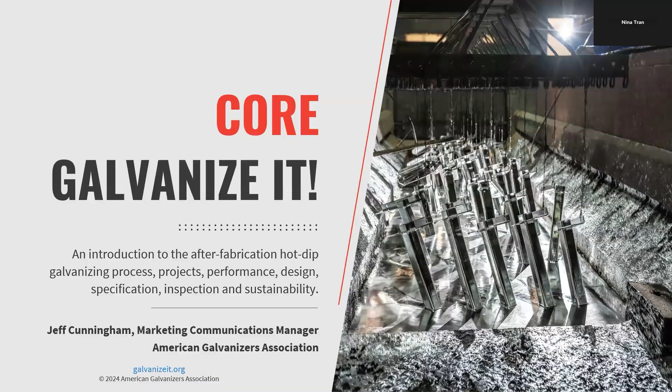The purpose of this seminar is to educate architects, engineers, and other specifiers about the benefits of utilizing hot dip galvanized steel on a myriad of projects throughout North America. You'll also be able to differentiate hot dip galvanizing from other zinc coatings, since sometimes we get confused with those. And then, of course, recognize positive environmental and economic contributions to the goals of sustainable development, which is critical in the world today.

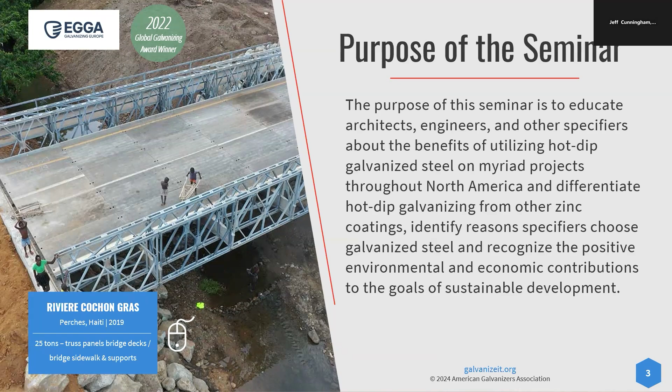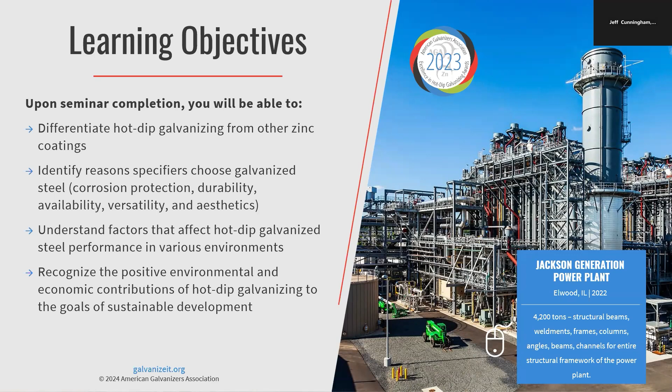Learning objectives: differentiate hot dip galvanizing from other zinc coatings, and identify reasons why specifiers choose galvanized steel. First and foremost, corrosion protection, but we'll also go into durability, availability, versatility, and aesthetics. We'll also understand factors that affect hot dip galvanized steel performance in various environments, and the goals of sustainable development, both environmentally and economically viable for hot dip galvanized steel.

Just a little bit about the AGA, or the American Galvanizers Association. We represent over 172 hot dip galvanizing plants in North America, Canada, US, and Mexico, with over 76 member companies. We provide technical support on design, inspection, and specification of hot dip galvanized steel. So if you guys are ever working on a project or have any questions, feel free to use us as a free resource. We also provide marketing material for our members, and for specifiers, once again, that's a free resource for specifying hot dip galvanized steel.

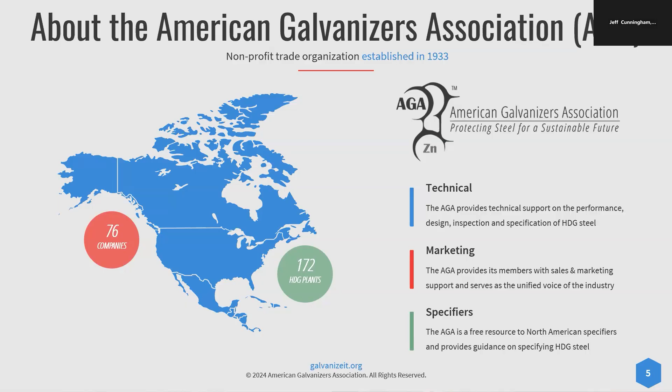First and foremost, we will talk about structural steel, how it's reliable, resilient, and recyclable. Since I think everyone's on the call right now, before we really get into the nitty-gritty, I just want to mention on these slides, anytime you see one of these mouse icons, it's clickable. It takes you right to our project gallery about that project. So pretty much every slide has a link on it to either a publication, case study, or anything like that.

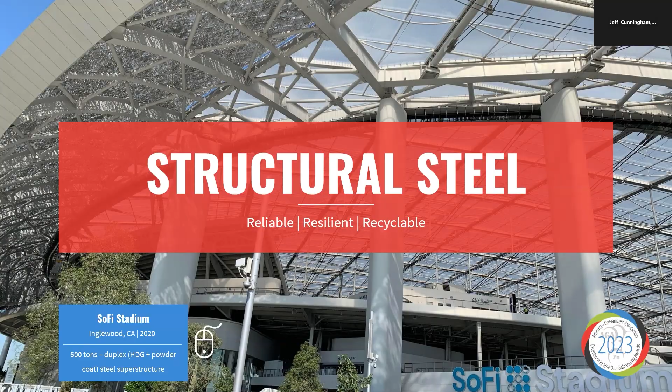So let's talk about why structural steel is reliable, resilient, and recyclable. Reliable, well, it's readily available. Steel is one of the most common building materials out there. It is cost effective. Galvanized steel has a quick turnaround time, so you can have something built as galvanized in as quick as 8-12 hours, allowing accelerated construction schedules and saving costs in time.

It's highly resilient too. It has a high strength to weight ratio compared to concrete, about 1 to 6. It's highly adaptable, so future expansions are super easy to do on existing hot dip galvanized structures. This also gives you more design freedom with aesthetic advantages. We're starting to see more architecturally exposed structural steel with galvanizing as a focal point of the project.

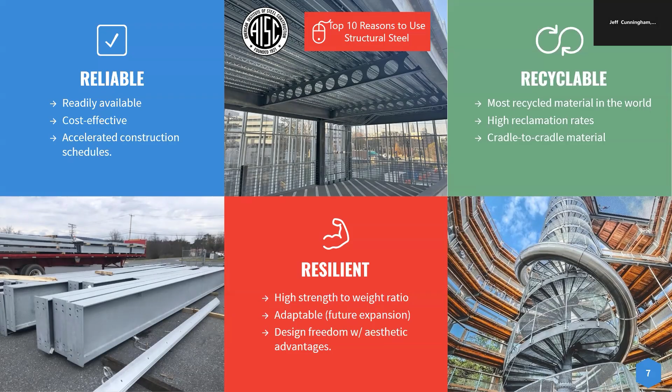And then it is highly, highly recyclable. It's pretty much the most recycled material in the world. About 99.7% of all steel is recycled, and zinc is about 80% recycled of all that's available. So both zinc and steel have super high reclamation rates, truly making it a cradle to cradle material. A lot of building materials are cradle to gate, but this is truly cradle to cradle because once it hits the end of life, zinc and steel can be fully recycled without any loss of properties.

So first and foremost, why do we coat steel with zinc? It is for conquering corrosion. Corrosion is just costly. A recent study by NACE International, now known as AMPP, estimated the global cost of corrosion at $2.5 trillion. That's about equivalent to 3.4% of the global GDP—659 billion alone in the US and 56 billion in Canada.

Other concerns with corrosion obviously are waste of natural resources and potentially hazardous situations. We've seen some recent bridge collapses—obviously our infrastructure needs work. Those potentially hazardous situations obviously have indirect costs as well; you're going to have to rebuild that bridge, rebuild the street, and usually those indirect costs are about 5 to 11 times the direct cost of the project. So it's pretty costly, and then also you're going to hear public outcry. We've obviously heard it in the news, and nobody wants negative attention towards what they built.

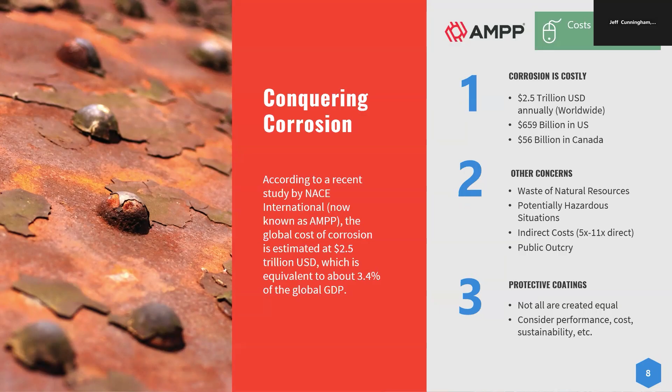So that's why we have protective coatings. Now, not all are created equal. We definitely have to consider performance, cost, sustainability, that sort of thing, and we'll dive into those a little bit deeper.

I sprinkled throughout a couple cool case studies that we've featured, a couple of our excellence awards from past years, that I will sprinkle throughout this presentation.

It protects the outside from the outside elements. It's a pretty humid climate in North Carolina, so obviously protecting against that. But it also protects the inside of the greenhouse, from all the pesticides, fertilizers, and chemicals they're using to treat the plants. It protects the inside as well because it's a full immersion process, so all that part of the galvanized steel gets covered.

All right, so we're going to go into the hot dip galvanizing process. It's good to know the actual process. This is mostly for galvanizers to control and everything, but being a specifier, it's good to know the process, and it kind of helps you design better for it.

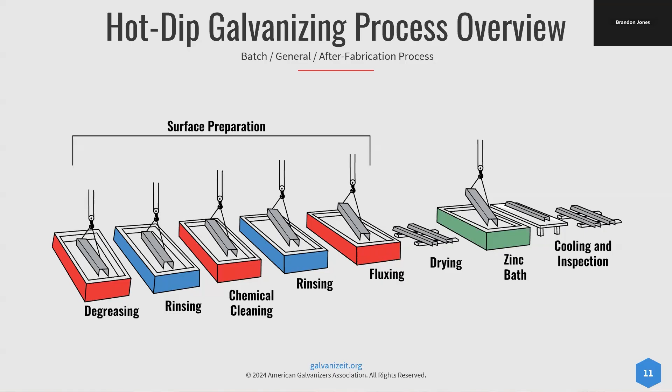This is the overview of the galvanizing process. It goes through a series of surface preparations, so cleaning the steel, because this steel has to be cleaned in order to react with the zinc. It's dipped in that zinc bath and then it's cooled and inspected. Overall, a pretty quick process.

Surface preparation is absolutely necessary, as zinc will only react with clean steel. When the steel gets dipped in the hot zinc, it actually has a metallurgical bond and fuses together, so it needs to be clean in order for that to happen.

It goes through three cleaning solutions: degreaser for dirt, oils, and organic residue; chemical cleaning for mill scale and oxide, so rust.

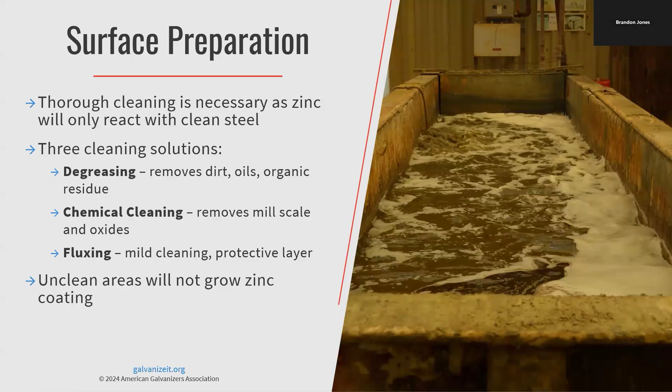And then fluxing is actually two things. Mild cleaning gets off anything that is left on there, and it also puts on a protective layer, so while that piece is waiting to go into the zinc bath, it's not picking up anything. Once again, unclean areas will not grow that zinc coating.

And then comes the actual galvanizing process. Steel is fully immersed in a bath of molten hot zinc, about 830 to 850 degrees Fahrenheit. Bath chemistry per ASTM specifications has to be at least 98% pure zinc. Most every galvanizer I know out there is running more like 99.5, 99.6% pure zinc. Up to 2% additives include aluminum, bismuth, and nickel, which have no effect on the coating whatsoever, mostly just the fluidity of the bath.

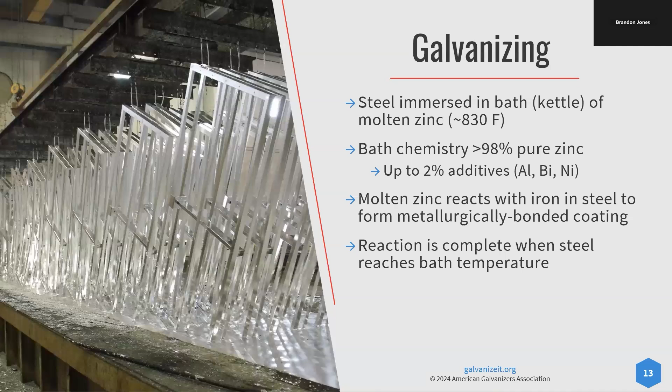The molten zinc reacts metallurgically to form a bonded coating, and the reaction is complete when the steel reaches the bath temperature. So depending on how big the piece is, it could be as short as 2 minutes all the way up to about 15.

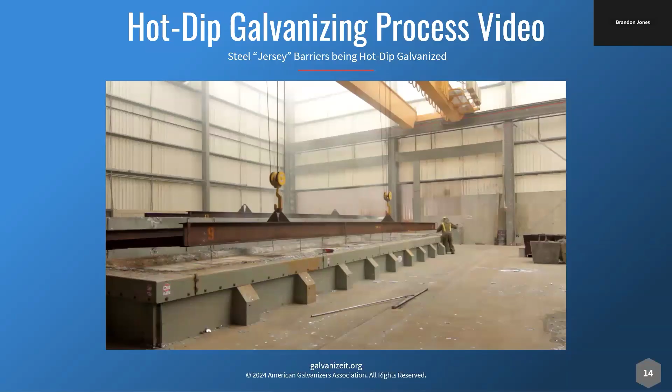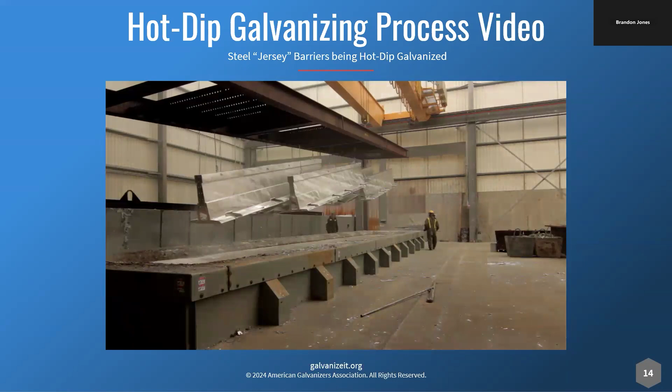All right, here is a galvanizing video for you. Most of the time, the newer plants will have a completely enclosed kettle too, so it'll be entirely closed and then big metal doors open and the pieces move through. Right now, they're just skimming away the ash, the dross, at the top. And even these big ones, it's about a whole 10-minute process. As soon as they're cool enough to touch, you can erect it that same day.

Inspection is pretty simple and straightforward. Usually it's just a visual inspection with the naked eye, making sure there are no visual bare spots or anything like that. Coating thickness can be checked by a magnetic thickness gauge.

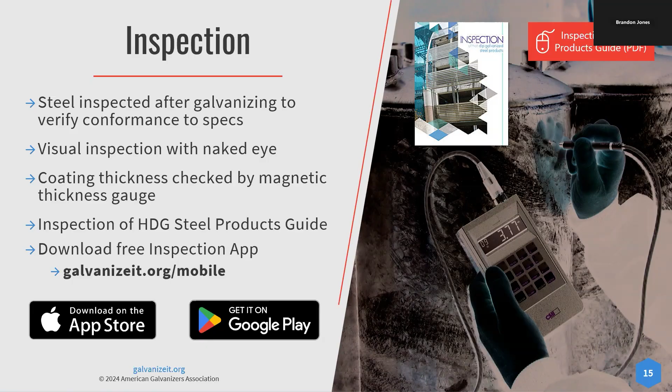All right, so what is zinc? We get this question every once in a while, like, what is zinc? I've heard it's a heavy metal, but it's also a healthy metal. So we'd like to preface it by saying it's natural, abundant, and it is essential to life.

So what is it? What is zinc? It's just naturally found in the air, water, and soil. About 5.8 million tons of zinc are cycled throughout the environment annually, and it is the 24th most abundant element in Earth's crust, so pretty abundant.

It is essential to life. Every single organism requires zinc in order to live. It's vital for cell division, crucial for growth of bones, organs, brain development, memory, sensory, cognitive, even strengthens our immune system. It's in literally everything, from car doors to nails to sunscreen to makeup, lotions, cold medicine, everything.

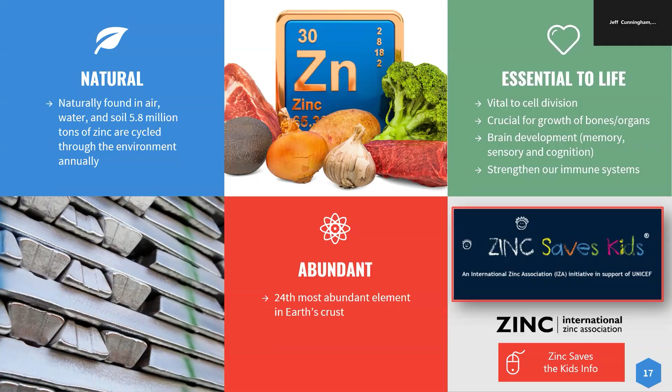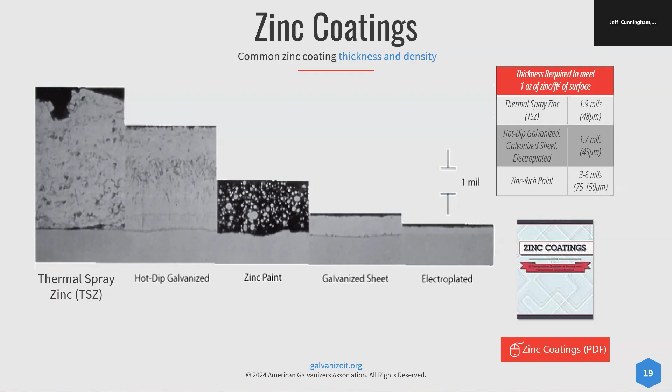You'll notice thermal zinc spray and hot dip galvanizing are going to be the thickest. But hot dip galvanizing is going to be the most dense because it's actually a metallurgical bond that's fused together. Zinc thermal spray or metallizing is, once again, a mechanical bond. It's just going to sit on top. It's only about 85% as dense as hot dip galvanized steel.

All right, so we'll go into these just a little bit more so you can tell the differences. Zinc thermal spray and metallizing is zinc wire or powder that's melted and then sprayed onto the steel surface. Shop or field applied, 85% as dense as hot dip galvanizing, and a mechanical bond. There are no alloy layers; you don't get that mechanical or metallurgical bond.

Zinc rich paint is zinc dust and organic or inorganic binders. This is often falsely called cold galvanizing—there really is no such thing as cold galvanizing. It provides cathodic protection dependent upon the conductive binder, zinc particles in contact, and percent of zinc in the dry film.

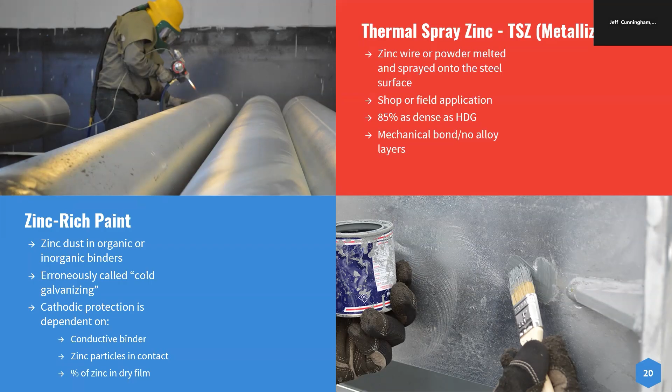If you have any zinc-rich questions, you can contact KTA Tator—they usually have some pretty good paint information. Mostly we see zinc-rich paint used as touch-up material on galvanized steel, which we also have a huge touch-up and material information on the website.

Continuous sheet and electroplating often get lumped into galvanizing because it's a similar process. It's a continuous inline dip for sheet, strip, and wire. Coating thickness and alloy layers are very minimal. Common products are G60, G90, Galvanneal, Galvalume. Electroplating is pretty similar—it's just no alloy layers and a very thin coating of pure zinc, usually more expensive than sheet galv. If you guys ever have any questions about these, contact the Galv Info Center. We put a link in here, but they are the ones that do all the continuous galvanizing.

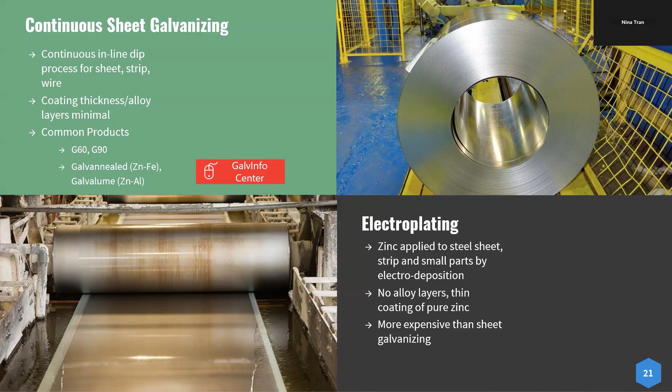All right, so why do specifiers choose galvanized steel? Well, we'll go over corrosion protection, durability, longevity, availability, versatility, and aesthetics. So first and foremost, it's that long-lasting corrosion protection. With galvanized steel, which is unique to it, you actually get three layers of protection within one coating system.

First is going to be barrier protection. Barrier protection just resists corrosion by isolating that steel from the environment. It's a full immersion process, so the insides of tubes, hollow structures, handrails, that sort of thing—the whole thing gets coated. So you're isolating the steel from the environment, therefore slowing down corrosion.

Cathodic protection. Now we know on the galvanic series of metals that zinc is anodic to steel and will sacrifice itself to corrode to protect the underlying steel until all the surrounding zinc is consumed. So then you have cathodic protection.

Then on top of that, you have the zinc patina. The zinc patina is unique to galvanized steel because it develops naturally over time, going through weathering cycles, wet and dry cycles. This becomes zinc hydroxide and zinc carbonate that builds up on the surface and actually develops the zinc patina, which is impermeable. It doesn't let water through, and it really slows down the corrosion rate. The zinc patina can quickly develop anywhere from a couple months up to a year, which really slows down the corrosion rate of the overall system.

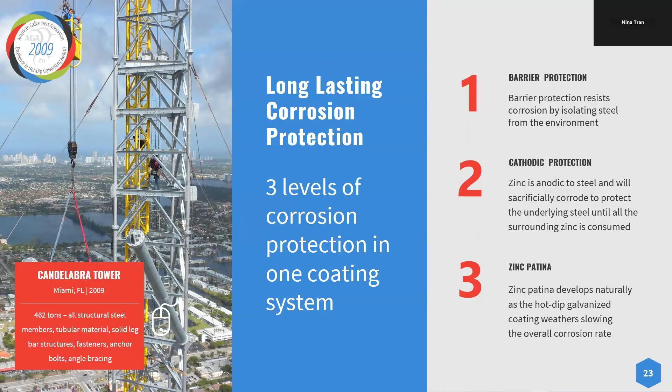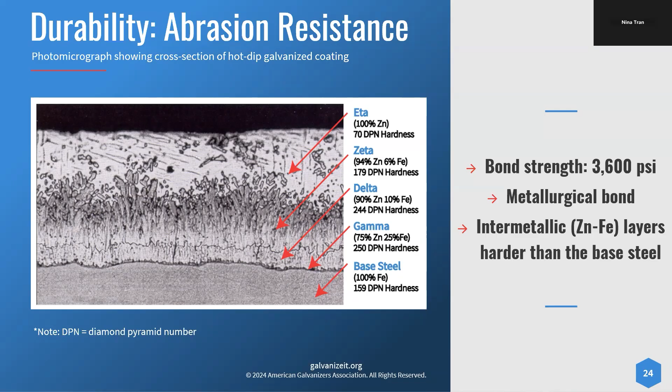I mentioned it a couple times: you get uniform and complete coverage, including interior coverage of hollow structures. You also get the same thickness on edges and corners because the coating grows perpendicular to the surface. It's a chemical reaction, so it grows the same everywhere, regardless of whether it's on a flat surface, edge, or corner. You also get fully coated threads, which are usually centrifuged or spun to remove the excess zinc.

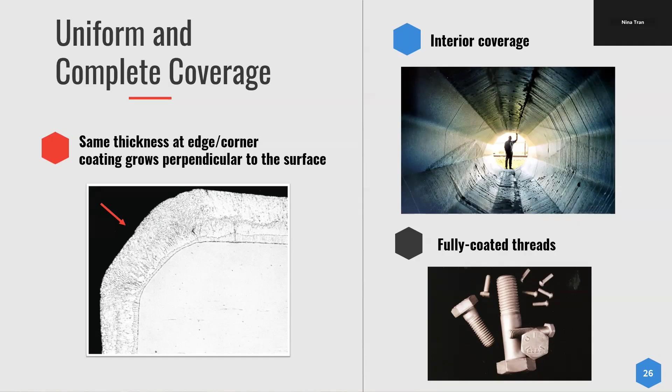Longevity in the atmosphere - we get this question a lot. How does galvanized steel last so long in pretty much any environment? We like to point out that galvanized steel is a 150-year-old process. It's been around for a while, and it continues to get better, but we have tons of real-world data to go off of. A lot of times people rely on salt spray testing as reliable data, but with galvanized steel, it does not accurately mimic real-world conditions because it doesn't allow the zinc patina to develop.

The zinc patina is critical to the longevity of hot dip galvanized steel. So when you use accelerated salt spray testing, you're not letting that zinc patina develop like it would in the real world. Therefore, it's going to give you inaccurate readings.

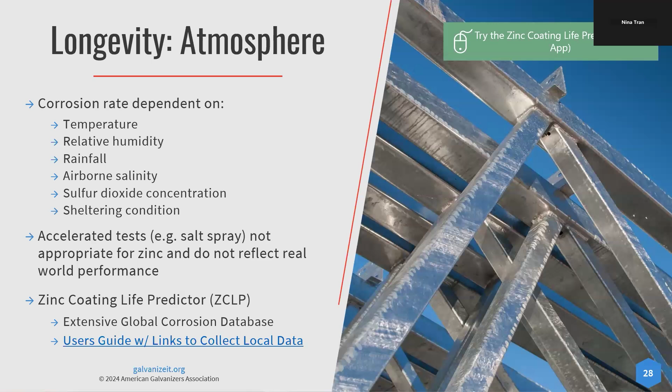That's why we came up with a zinc coating life predictor. We worked with Dr. Gregory Zhang and took extensive global corrosion data from the database - we put a link in here. We collected all this data and determined that corrosion rate was dependent upon temperature, relative humidity, rainfall, airborne salinity, sulfur dioxide concentration, and whether a sheltering condition existed. When we took all this extensive real-world global data and put it in, we get the time to first maintenance chart.

Time to first maintenance is defined as only 5% rusting of the steel surface—so really minimal rusting.

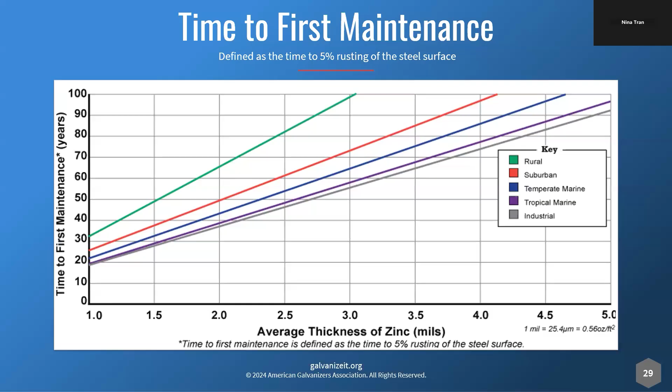Building in an industrial environment, we hit about year 75 before seeing 5% rusting of the steel surface. Very well could be that at 75 years it's already hit its design life—it can be fully recycled and built again. Or you might get out there at year 75 and realize there isn't 5% rusting yet, so it can last longer. This just gives an idea, off real world data, of how long galvanized steel will last building in some of the harshest climates.

We get this question about longevity in soil. It's more difficult to predict because there are highly varying properties within soil—you can have changes within soil, even between short distances, different soils. For example, maybe a clay-like soil on one side of the street and a rough rocky soil on the other side. So it's difficult, but there are primary and secondary factors for longevity in soil.

Primary factors include chlorides, pH level, and moisture content. Secondary factors are resistivity, temperature, and aeration.

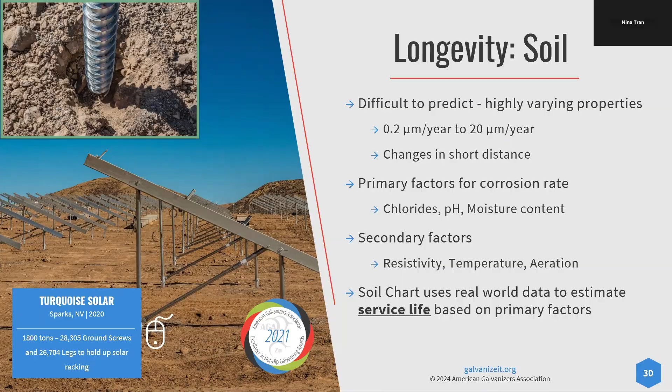Once again, we used the soil chart—we built it off of all the real world data to estimate full service life based on those primary factors. This is all available on our website; you can even download these as a PDF. These are our soil charts. Once you've determined the primary and secondary factors of the soil you're using, you can figure out what chart you're on.

So say we're working with low chlorides and a high pH—we're going to be on chart 3. Right around 4 mils of zinc on the piece is acceptable to ASTM standards. Anything in the red is less favorable, anything in the green is more favorable. Still, even in red, you're looking at plus 70 years or so. Feel free to use these on our website—just search soil charts and they'll show right up for you.

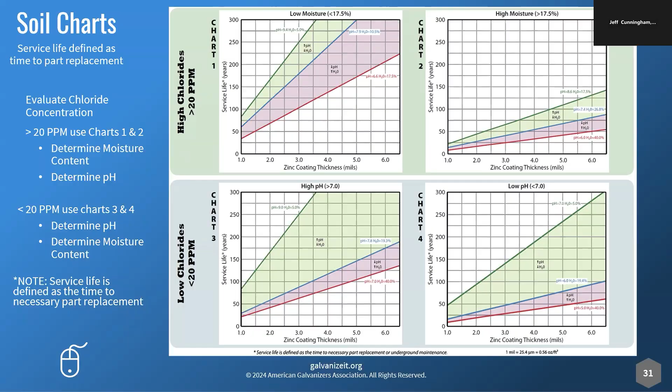Water is also difficult to predict, similar to soil—there are changes in water flow rates and impurities introduced. Primary factors are similar to soil: pH level, agitation, aeration, temperature, polarization, and any presence of inhibitors.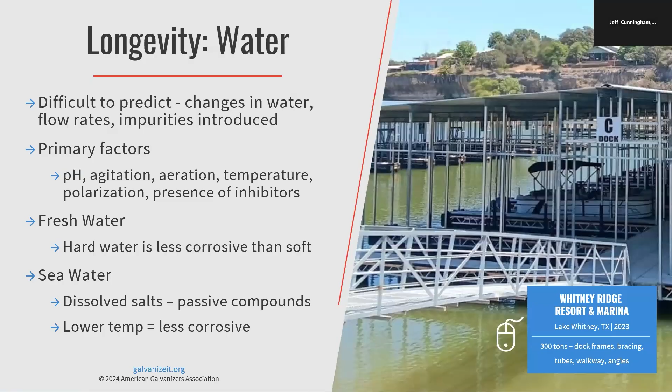For fresh water, a good rule of thumb is hard water is going to be a little less corrosive than soft, just because of the added chemicals in soft water. For seawater, you want to look at dissolved salts and passive compounds, and a good rule of thumb is: lower the temperature, less corrosive. We have a whole marine and water page on our website with all of our examples. We're seeing more docks and marinas being built out of galvanized steel because it does well with water.

We like this slide—it sums up what is corrosive to hot dip galvanizing and what gives really good performance. Corrosive conditions are high and low pHs, anything above 12.5 or below 4, and contact with dissimilar metals. It's been done before, but you have to consider how much surface area is actually touching and the environment. Most of the time it's best to isolate with a non-conductive material—rubber, cement, paint, something like that.

Good performance comes from chemically neutral solutions, pH level 4 to 12.5, and treated wood—stainless and hot dip galvanizing does great with treated wood. Hot dip galvanized rebar, reinforced steel, is amazing—it actually protects the concrete from outgassing, spalling, and cracking. It's really great; we do a full rebar seminar as well where you can find a wealth of information, but it does great in concrete.

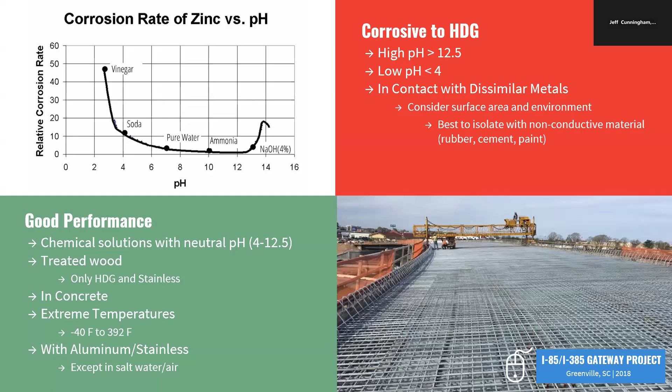It performs well across extreme temperatures, all the way from -40 to 392 degrees Fahrenheit, and also with aluminum and stainless—except right off the bay of salt water and air, which can accelerate corrosion between aluminum and stainless.

This is a good longevity project. This is the Frederik Meijer Botanical Gardens in Grand Rapids, Michigan. This was built and completed in 1994, so it's been over, about 31 years.

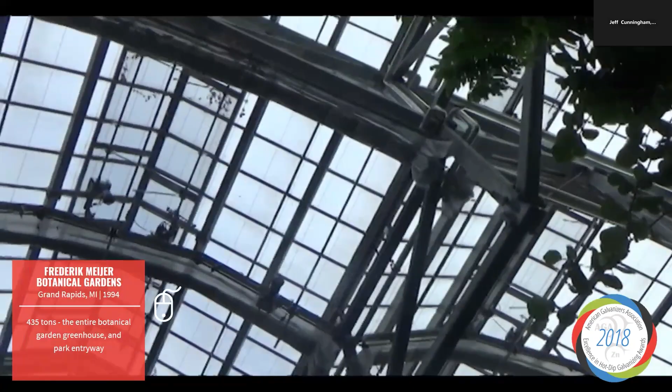The entire structure is hot dip galvanized steel. We went out here in 2018, and it looked honestly the same as it was. We took some readings, and they were all 6+ mils on it. This is after 30 years in Michigan's weather, 9 feet of snow, 90-mile-an-hour winds.

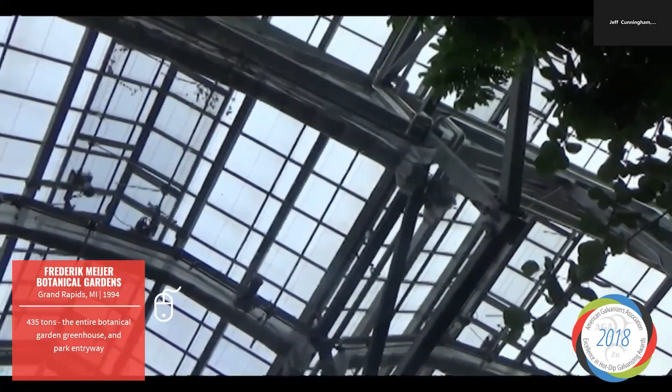Also, kind of like the Metrolina greenhouse, they got to account for all the corrosion happening inside with the chemicals used to treat the plants, fertilizers, pesticides, that sort of thing. Talked to the architect when we were there, and yeah, he said that it looks the exact same that it was the day it was erected in 1994.

Availability - it is factory controlled. There are no humidity requirements for galvanizing, so it can be done 24/7, 365, rain or shine. A lot of galvanizers like to brag that they run 6.5 days a week.

Galvanizers throughout North America - average kettle is about 40 feet, although many of the bigger or newer ones are 50 or 60 feet. You'd be amazed at what they could fit in the kettle, even if it's larger than 60 feet. Sometimes they can do a progressive dip - they dip one half and then flip it around and dip the other half.

Quick turnaround time, no curing time. As soon as that piece is cool enough to touch, you can erect it.

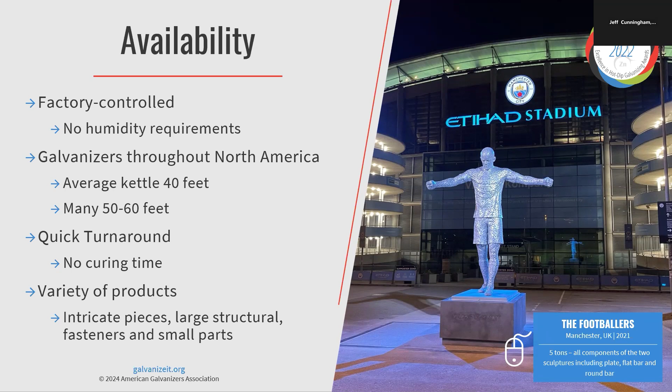Variety of pieces, intricate pieces - that footballer structure, that's all galvanized. And then all the way down to fasteners, small parts, can all be galvanized as well.

More with less - high strength to weight ratio compared to that of concrete. You can use about 1 to 6 of concrete.

Ease of expansion - it can be inventoried and stocked as well. It just lasts so long that a lot of times it'll just sit in the stockyard and be just fine.

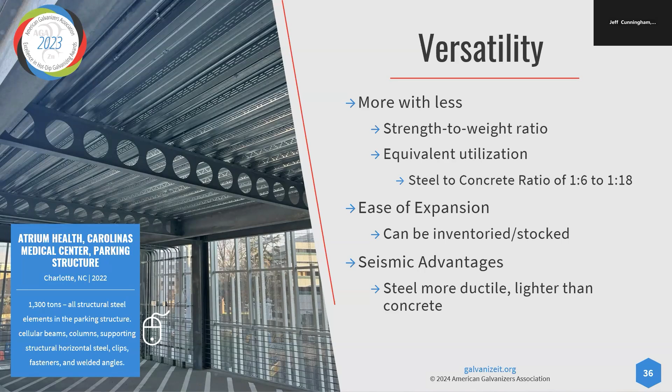It does have better seismic advantages than concrete. It's just more ductile and lighter, so it's going to do well in earthquakes and that sort of thing.

Modern natural appearance kind of gives that matte gray, non-reflective, uniform finish. So it kind of doesn't really take away from anything, blends in with their environments.

We are seeing more exposed design elements, AESS projects, really using the steel arcs and trusses as part of the architecture. Now, if you're just trying to meet finishing requirements of ASTM A123, that might not meet the aesthetic desire for AESS.

So you just want to have an additional discussion with your galvanizer - say, hey, this is an AESS project. They can help you out. We also have an AESS specifiers guide that we link to here as well.

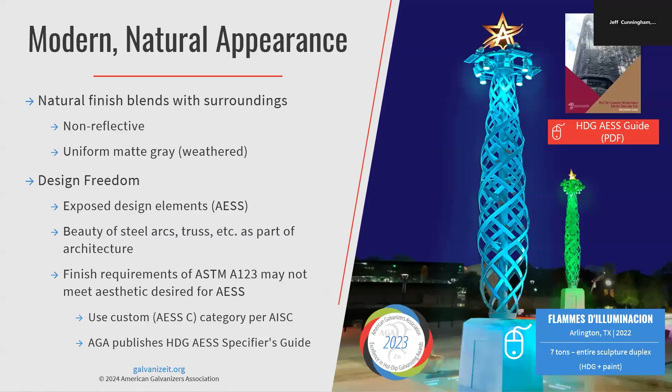A lot of people ask about natural weathering, like when is it going to look all the same? Or, I have a piece and it was really shiny on one side and dull on the other. That happens - steel chemistry can play a part. A lot of different factors.

Corrosion protection is still there. Nothing affects the coating. So we did a couple of examples for you guys.

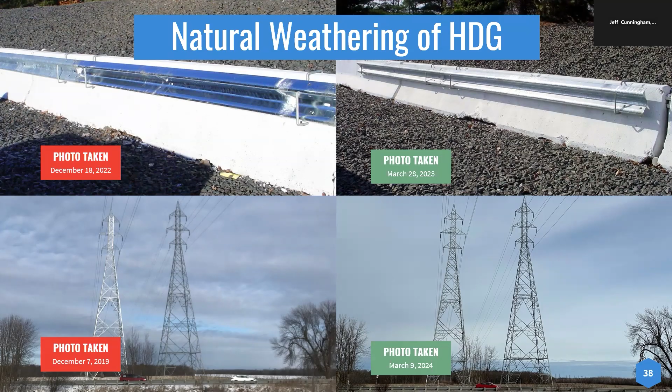Same thing below - 2019 photo was taken of a new power line put in, and then about 3 or 4 years later, it looks the same. It probably happened a little sooner than that, that's just when we could get the picture taken, but it gives you an example that it'll definitely weather out within a few months.

Sometimes we need color. That matte gray isn't going to cut it, so that's why we offer a duplex system. Duplex system is a paint or powder coat over galvanized steel. This can be done for many reasons, mostly aesthetic preference. Sometimes it's branding matching, like fitting in with the existing structure. Safety identifications, gas lines, something like that.

A lot of times it's used for repairing existing structures as well. But what happens when you paint or powder coat over galvanized steel? You're actually getting a synergistic effect, and it provides both coatings 1.5 to 2 times the sums of the systems alone. And it extends the maintenance cycle of the paint, and you can usually drop one maintenance cycle of paint, and you'll never have to fully repaint. It's usually just touch up and repair.

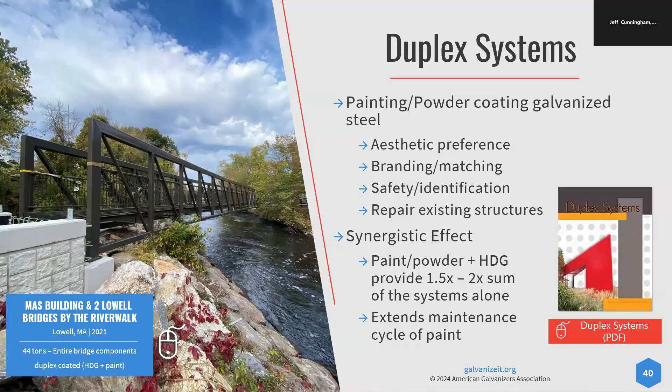We'll just talk a little bit about steel's sustainability, and then we will go ahead and do a cost case study through our calculator, which is available on our website that you guys can plug in all your project parameters and get a nice readout of all the different coating prices.

Anyway, so let's start with environmental advantages. We know that iron and steel, or iron and zinc, are natural, abundant, and essential to life. Iron ore is the fourth most abundant element in Earth's crust, and zinc the 24th most abundant. Both are infinitely renewable resources. So both iron and zinc can be 100% recycled, multi-cycled without any loss of properties, and they both boast high reclamation rates. Virtually 100% of steel is recycled, and about 80% of the zinc is recycled.

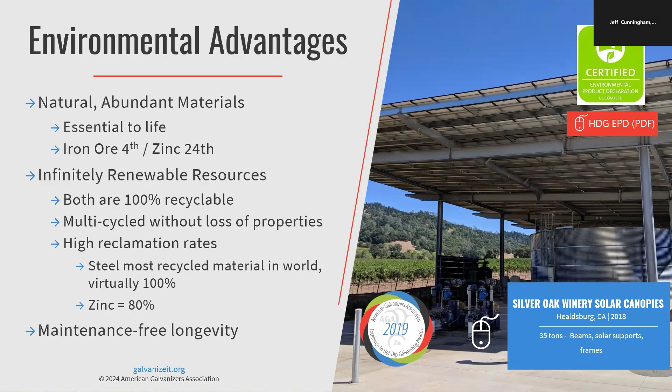Maintenance-free longevity as well. So once you build it, it's going to look good. You won't have to maintain it. You're saving money in the long term. And this is a great sustainable project.

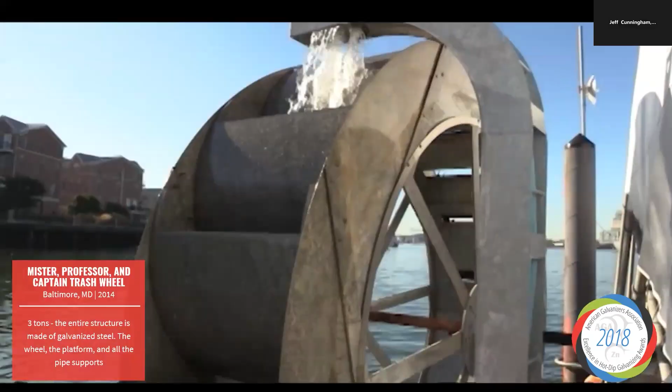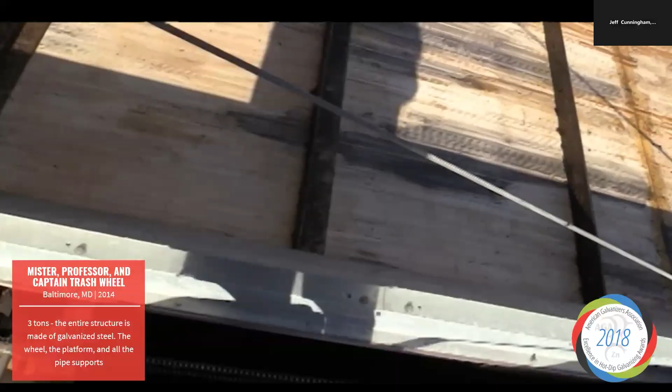This was the Mr. Professor and Captain Trash Wheel. I'd probably say this is my favorite example we have in our project gallery. They are these galvanized steel structures that float around the harbors, and all they do is pick up trash. You can see the water wheel there. They become local celebrities, they have googly eyes now. There's actually a map you can look at where they're at. I think they've added 2 more since then, so I think they're up to 5 now. Since their debut in 2014, they've collected more than 1.5 million pounds of trash.

So just an easy way to automatically clean up our harborways. And these are going to require little to no maintenance with galvanized steel. Another really good sustainable project.

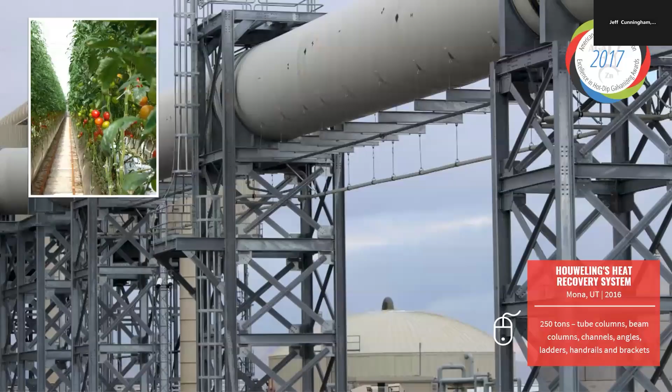This is the Houweling's Heat Recovery System, built in Mona, Utah in 2016. These huge columns were built adjacent to a power plant, and they actually use the heat and the CO2 emissions from the power plant to assist in growing tomatoes. So the heat warms the greenhouse, and the carbon dioxide fertilizes the tomatoes. Complete win-win as it offsets emissions and helps make the tomato plants more sustainable. And obviously, built with galvanized steel, you won't have to maintain this. Really cool project, hope we start seeing more of these around.

All right, economic advantages, initial cost benefits. So we'll go over overall material and application costs. You really do see the time savings in construction because it's such a quick process. You also see life cycle cost savings, which is the total cost throughout the project life, including maintenance costs and time value of money—so interest and inflation, which is important. Often hot dip galvanizing's initial cost is its life cycle cost.

We've seen on a lot of those charts and information that even in an industrial environment, you're looking at 75 years before 5% rusting. So it's a long time. Often it's an initial cost and you're done, you don't have to maintain it.

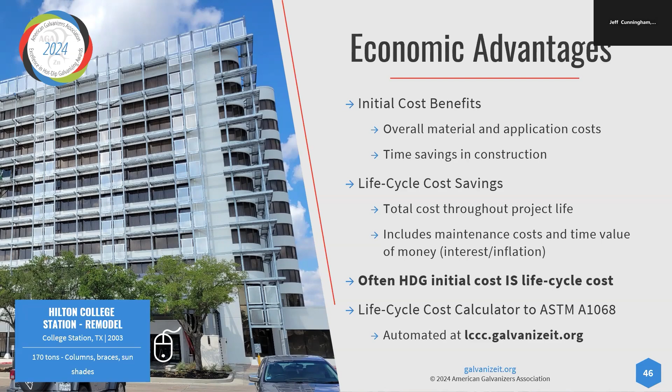So we did our life cycle cost calculator. It's to ASTM A1068, completely automated for you. You can visit lccc.galvanizeit.org to put in your project parameters. But we're going to go ahead and do one with everyone right now, and then feel free to play around with the calculator later.

So the initial cost parameters are going to be material and number of coats, surface preparation, cleaning methods, shop or field application, and labor. Life cycle parameters are maintenance costs on a practical cycle, which is unique to the system and dictated by the manufacturer. This analysis considers net present value and net future value, so inflation and interest. Our data sources are NACE, the KTA survey, and a galvanizing industry survey we did as well.

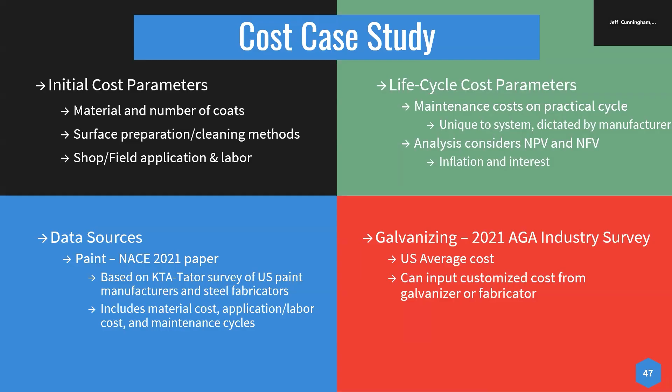For our cost case study project parameters, we're looking at a typical mix of sizes and shapes. We're building a 50,000 square foot project, 70-year design life, in a moderately industrial environment, C3. This very well could be a parking garage, small stadium, petrochem plant, something like that. Surface prep and application are SP10, automated. Duplex would be SP16, and all coats are applied in the shop.

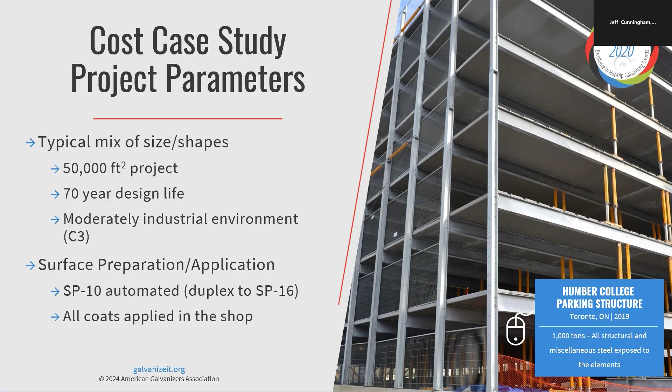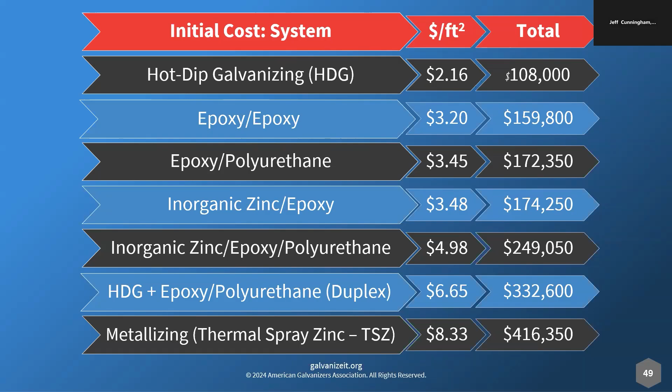So this is what our handy dandy calculator spits out for the initial cost of the system. Right off the bat, you can see $2.16 a square foot for galvanized steel, all the way up to $8.33 a square foot for metallizing. So right off the bat, you're already seeing initial cost savings from the initial costs of the system.

Now, if we go to the 70-year design life cycle cost, hot dip galvanizing doesn't change, because we know it's not going to be 75 years before we see 5% rusting in an industrial environment. So we've already hit 70 years, it's done, we didn't need to maintain it once. So your initial cost is that.

Every single other one has grown exponentially except for the hot dip galvanizing and epoxy polyurethane, which is now $15.66 a square foot — that's the duplex system. So you can see the life cycle cost savings between hot dip galvanizing on its own and also hot dip galvanizing with paint or powder coat, because you're losing one maintenance cycle of the paint, extending the maintenance cycles of the paint, and losing a full repaint — it all just adds up over the life of it.

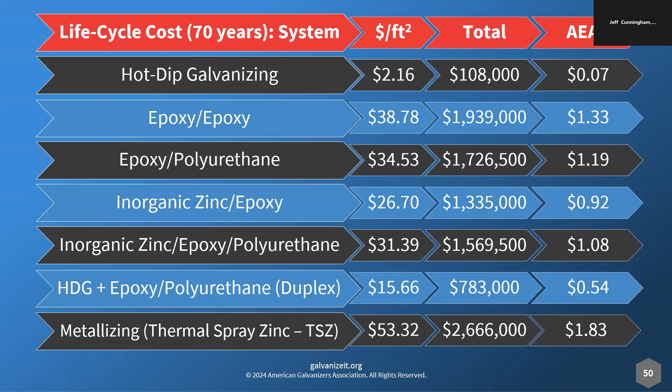So once again, I highly recommend everybody take the time and check out that calculator on our website. It's kind of fun to play around with, and it gives you a printout, a PDF afterwards, of all the coatings and stuff.

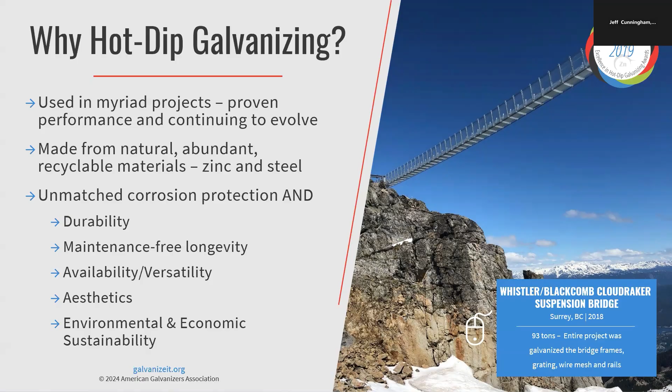All right, so in summary, why do we hot dip galvanize? Well, it's just a 150-year-old proven process with proven performance that continues to evolve to get better. It's all natural, abundant, recyclable materials — zinc and steel. Unmatched corrosion protection and durability, maintenance-free longevity, availability, versatility, aesthetics, and environmentally and economically sustainable.